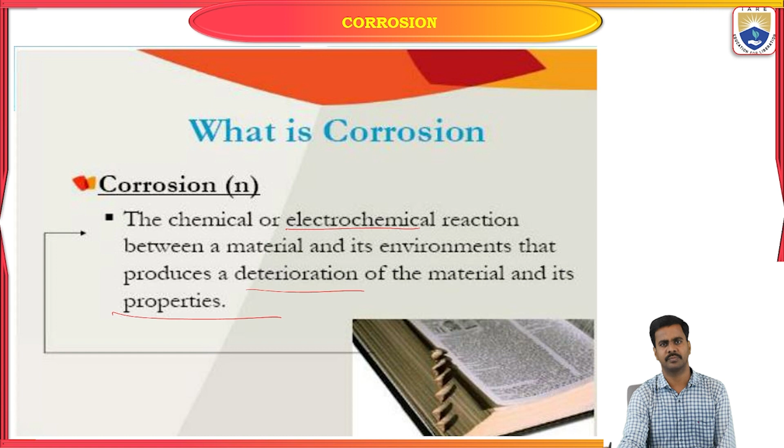So corrosion is nothing but a chemical or electrochemical reaction between the materials and its environment that produces deterioration or decay of the material and their properties. Major properties of the metals will be ruined by the process of corrosion.

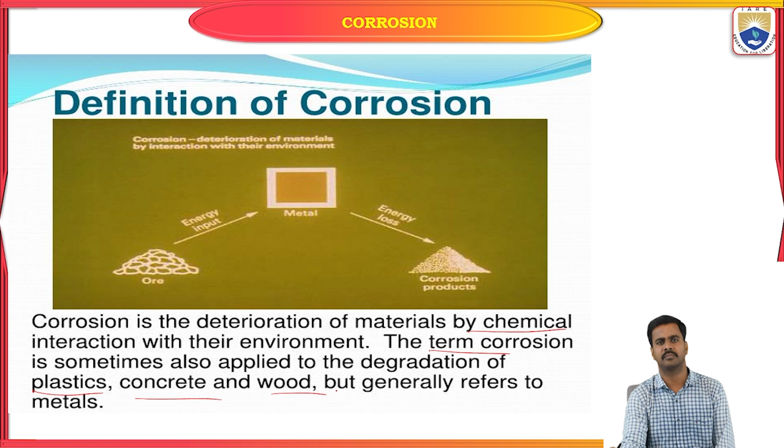So coming to the definition of corrosion: the deterioration of material by chemical interaction with their environment. The term corrosion is sometimes also applied to the degradation of plastics, concrete and wood, but generally it refers to metals.

Humans have most likely been trying to understand corrosion for as long as they have been using metal objects. The most important periods of pre-recorded history are named for metals that were used for tools and weapons, for example the Iron Age and Bronze Age, with a few exceptions.

Metals are unstable in ordinary aqueous environments, so metals are usually extracted from ores through the application of considerable amounts of energy. Certain environments offer opportunities for these metals to combine chemically with elements to form compounds and return to their lower energy levels.

Usually metals are highly reactive, so they are present in the earth's crust in a combined state, that is as ores. During the extraction process, some amount of energy is applied to this ore, hence the metal is separated from the ore. During this extraction process, the metal becomes unstable and highly reactive.

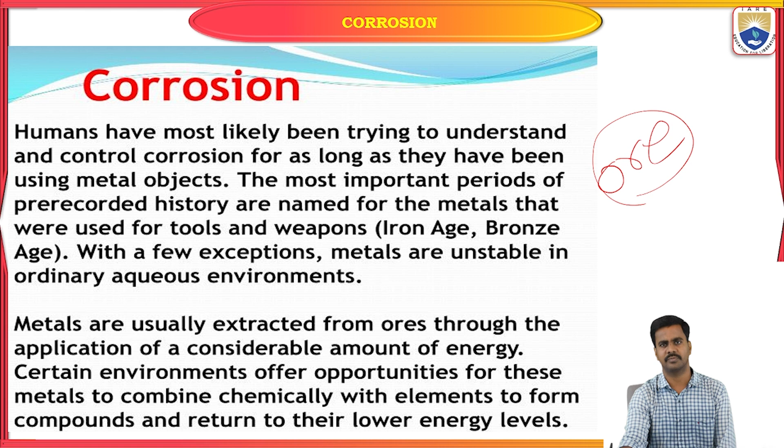So it is ready to react with whatever environmental factors surround it. Corrosion is the primary means by which metals deteriorate.

Most metals corrode on contact with water, acids, bases, salts, and aggressive metal polishes, and other solid and liquid chemicals. Metals will also corrode when exposed to gaseous materials like acid vapors, formaldehyde gases, ammonia, and sulfur-containing gases.

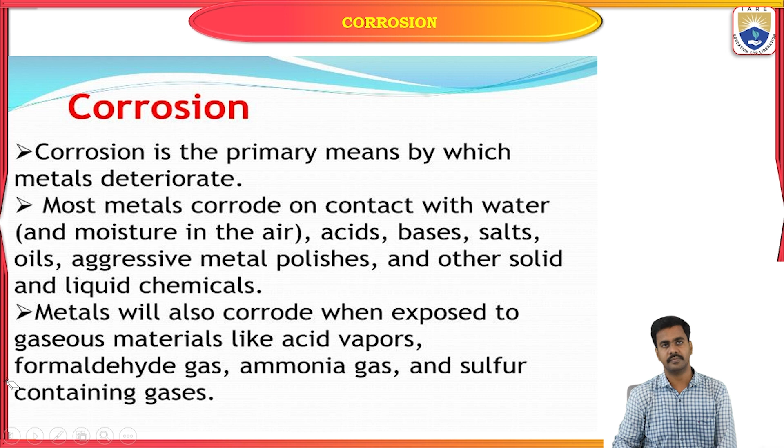So what are the major causes for corrosion? Acids and alkali, salts, mercury, water, and air which surround the metal. As we know, different types of acids are present in the environment, like HCl, H2SO4, and nitric acid. A number of acids are present in the environment.

Similarly, alkali is nothing but bases, and a number of bases are present in the environment. And salts, like sodium chloride, ammonium chloride, etc. And mercury and water - moisture is also present in the environment. Air, in the sense of oxygen.

So decay or destruction of material by the attack of these foreign substances is a major cause of corrosion. Moreover, interaction between two or more electrochemical surfaces, for example between steel and zinc metal, and between a metal surface and the atmosphere.

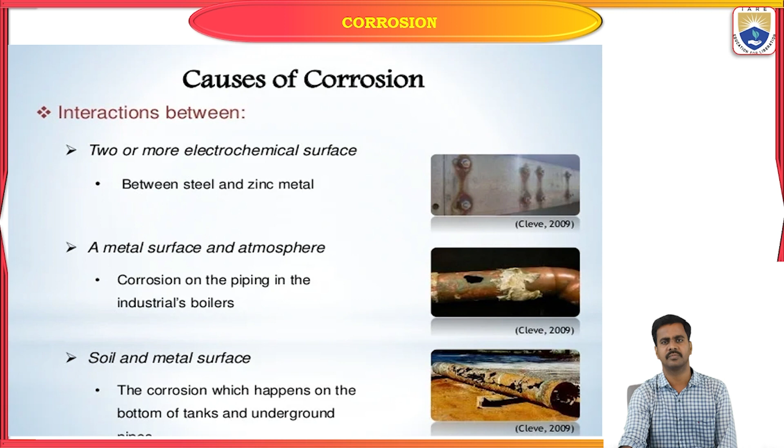Another major cause of corrosion is the nature of the metal or alloy. Corrosion process also depends on the nature of the metal, that means the reactivity order. So the position of the metal in the electrochemical series also affects the rate of corrosion.

Second, the presence of inclusions or other foreign matter at the surface. Homogeneity of the metallic surface structure. And nature of the corrosive environment, like acidic environment and basic environment, which surrounds the metal.

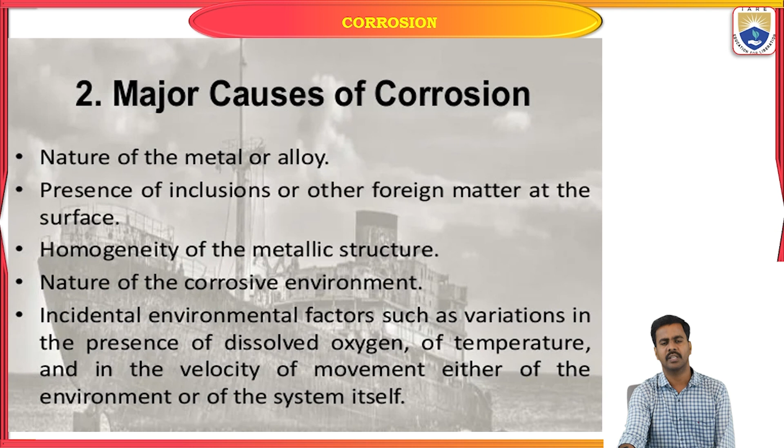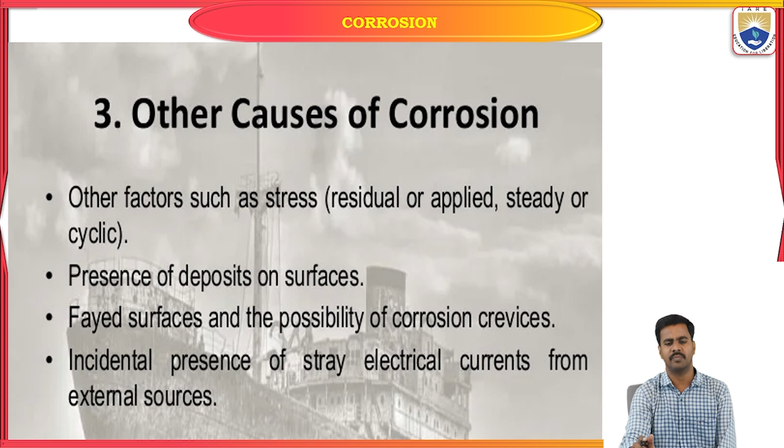Incidental environment factors such as variations in presence of dissolved oxygen, temperature and velocity of movement, either of the environment or of the system itself, and other causes such as stress, presence of deposits on surfaces, possibility of corrosion crevices, and incidental presence of stray electrical currents from external sources, depend on the nature of the environment. Basically, the destruction process has been classified into two types: dry corrosion and wet corrosion.

So what is the difference between dry and wet corrosion? First, coming to dry corrosion, it involves direct attack of dry gases like air and oxygen on the metal through chemical reactions. As a result, an oxide layer is formed over the surface. This type of corrosion is not common.

Next, the second type of corrosion is wet corrosion. It involves direct attack of an aqueous medium, like strong or dilute, acidic or basic nature of the environment, on the metal through electrochemical reactions.

In the wet corrosion process, the mechanism looks like an electrochemical cell. We know what an electrochemical cell is: anode and cathode electrolytes are present in the cell, and the anode and cathode are connected with an external circuit. So if we observe the mechanism of wet corrosion, it is very similar to the construction of an electrochemical cell.

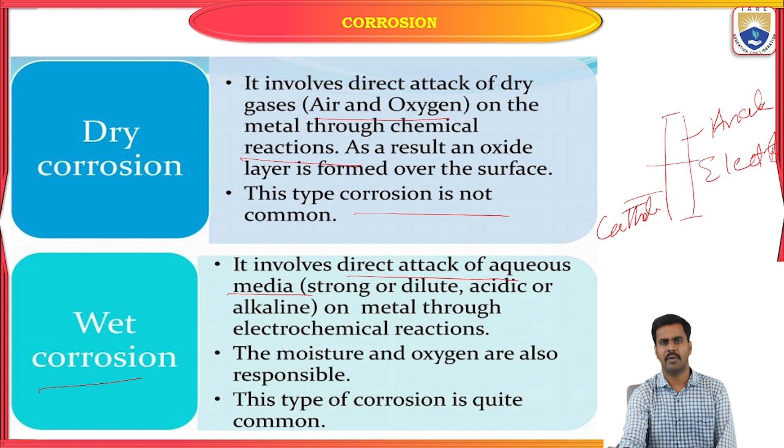If you take some metal, the part of the metal which is exposed to the environment acts as the anode, and the rest of the part which is not exposed to the environment acts as the cathode. The environment, or the nature of the environment in which the metal is present, acts as the electrolyte. That's why wet corrosion is also known as electrochemical corrosion.

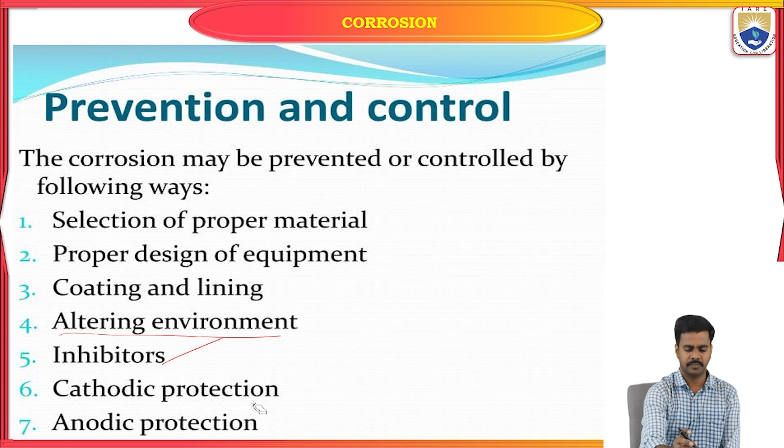Next, how can we prevent or control the process of decay? Corrosion may be prevented or controlled by the following ways: selection of proper material, proper design of equipment, coating and lining of the equipment, altering the environment, inhibitors, cathodic protection, and anodic protection. These are the major controlling methods of corrosion. Let us see one by one.

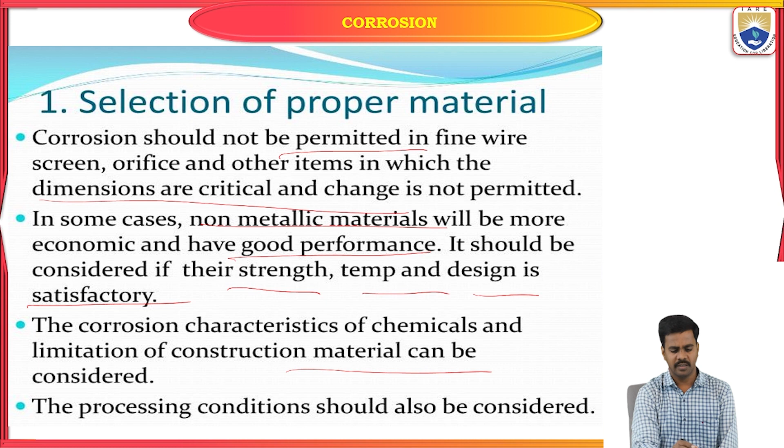Selection of proper material: corrosion should not be permitted in fine wire screens, orifice, and other items in which the dimensions are critical and change is not permitted. In some cases, non-metallic materials will be more economic and have good performance; this should be considered if their strength, temperature, and design is satisfactory. The corrosion characteristics of chemicals and limitations of construction material can be considered, and the processing conditions should also be considered.

Second, proper design of equipment. In the design of equipment, the number of fittings like baffles, valves, and pumps should be considered. Corrosion can be minimized if the equipment design facilitates it, so we should eliminate the crevices present on the surface of the equipment, ensure complete drainage of liquids, ease of cleaning, and ease of inspection and maintenance of the equipment. Direct contact between two metals should be avoided if they are widely separated in the electrochemical series, or they should be insulated.

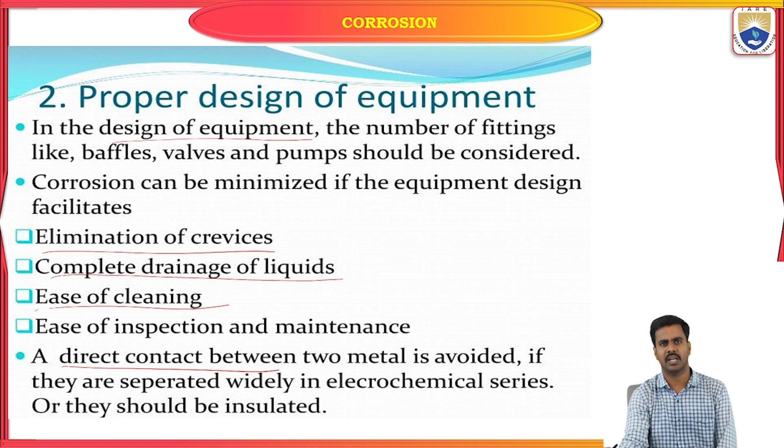Next, coatings and linings of the material. Non-metallic coatings and linings can be applied on steel and other construction materials in order to combat corrosion. There are several types of coating methods on the surface of the metal; by coating the metal, we can prevent or control the process of destruction.

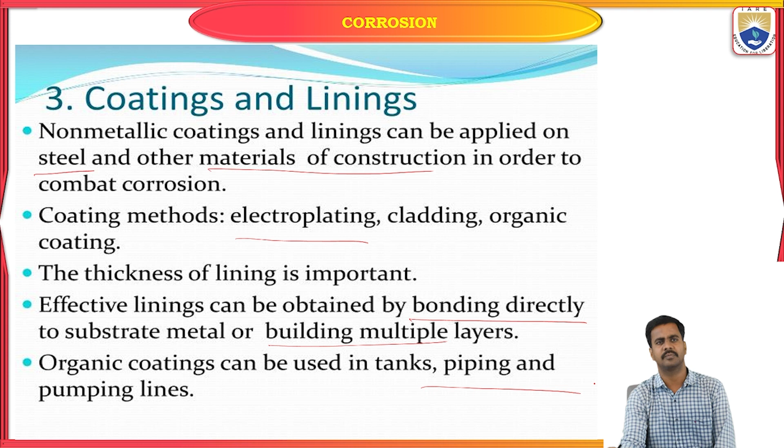For example, electroplating, galvanizing, and cladding. The thickness of the lining is important. Effective linings can be obtained by bonding directly to the substrate metal or by building multiple layers. Usually organic coatings, nothing but paints, can be used in tanks, piping, and pumping lines. A thin non-reinforced paint-like coating of less than 0.75 mm thickness should not be used in services for which full protection is required. The cladding of steel with an alloy is another approach to this problem.

So, SP glass can be bonded to steel so that the liner is 1.5 mm thickness, which is impervious in nature. Piping and equipment lined in this manner are used in severely corrosive acid services.

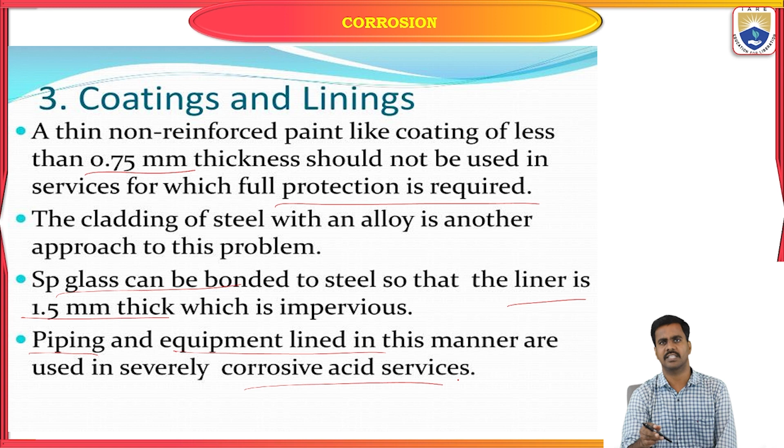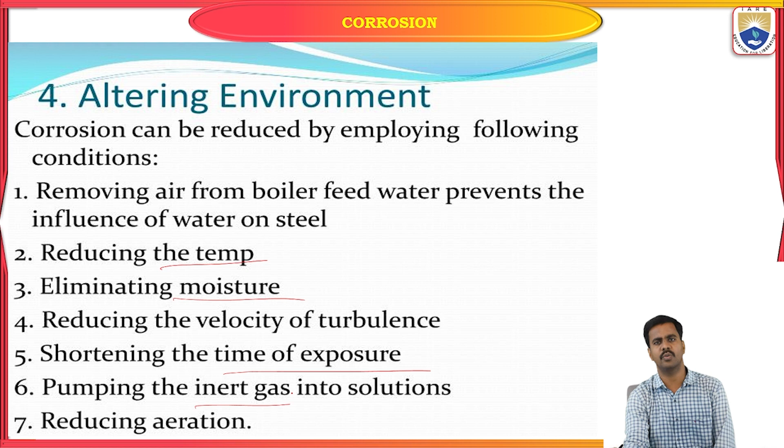And fourth, controlling method of corrosion is altering environment. Corrosion can be reduced by employing following conditions: removing air from boiler feed water prevents the influence of water on steel, reducing the temperature, eliminating the moisture, reducing the velocity of turbulence, shortening the time of exposure, pumping inert gas into solutions, and reducing aeration.

Next, inhibitors. The corrosion inhibitors are added to the environment to decrease destruction of metals. Usually these form protective films on the surface of the metals. These protective films are of several types: adsorption type, adsorbed on metals; scavenger type, example remove corrosion agent; and vapor phase type, sublime and condense on metal surface.

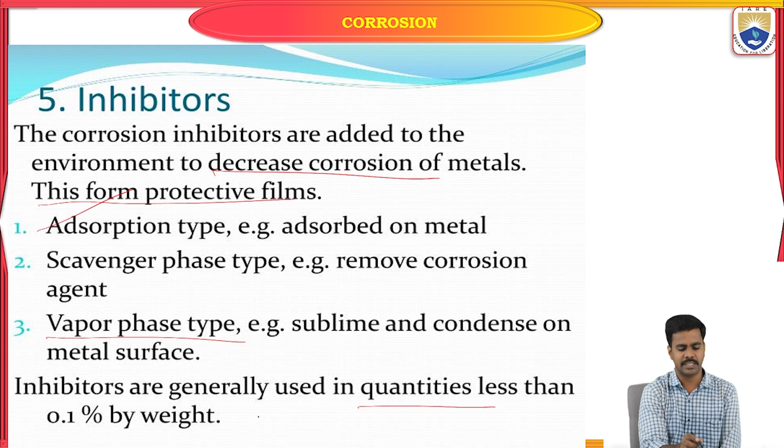Inhibitors are generally used in quantities less than 0.1% by weight. Some more inhibitors: chromate, phosphate, silicates protect iron and steel in aqueous solution, and organic sulfide and amines protect iron and steel from acidic solution. Copper sulfate protects stainless steel in hot dilute solution of H2SO4.

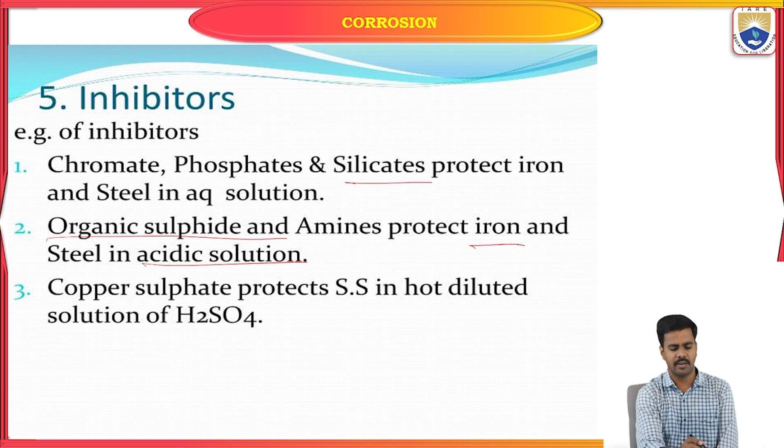Next, one more protective method, cathodic protection. Especially we can apply cathodic protection and anodic protection in case of wet corrosion or electrochemical corrosion, since it is a type of electrochemical cell. The mechanism of electrochemical corrosion looks like the construction of an electrochemical cell. That's why we can apply cathodic protection or anodic protection in case of electrochemical corrosion.

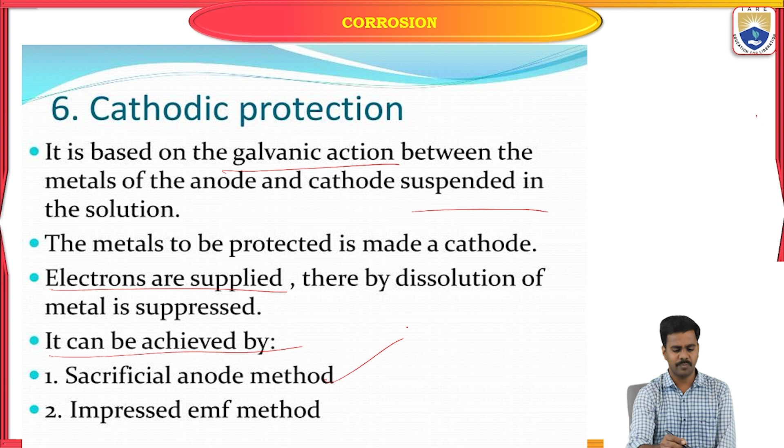So first, let us see the cathodic protection. It is based on galvanic action between the metals of the anode and cathode suspended in a solution. The metal to be protected is made a cathode, and electrons are supplied. Thereby dissolution of metal is suppressed. So cathodic protection can be achieved by sacrificial anode method and impressed current or EMF method.

Sacrificial anode method: in this method, anodes are kept in electrical contact with the metal to be protected. Usually highly reactive metals are used as anodes. Hence, concentration of corrosion takes place on the surface of the anode. So the anode will be corroded to protect the cathode. The anode is sacrificed since it goes into the solution.

For example, for the protection of iron and steel tanks, metals such as zinc, aluminum, magnesium, and their alloys are used as sacrificial anodes. These are used in a limited pH range. Anode material is selected from the electrochemical series. The anode should not be poisonous and not detrimental to the products.

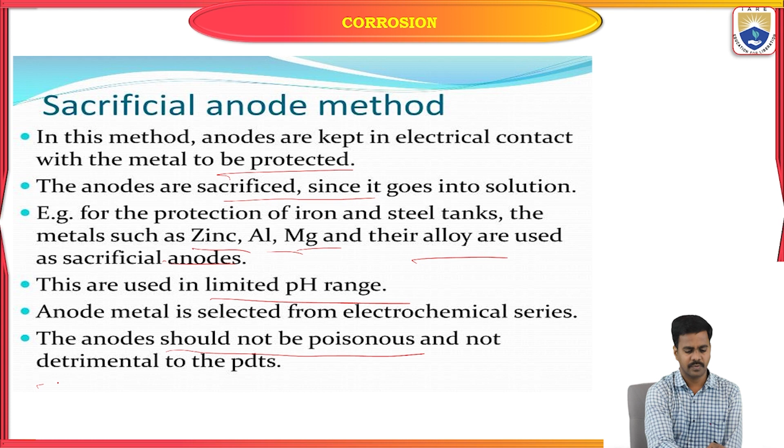Impressed EMF method or impressed current method is also known as applied current system. External voltage is impressed between the tank and electrodes. The negative terminal of the power source is connected to the material to be protected from corrosion, so the natural galvanic effect is avoided and the anode is maintained positive. Since the anode is not consumed, metal or non-corrodable material can be used.

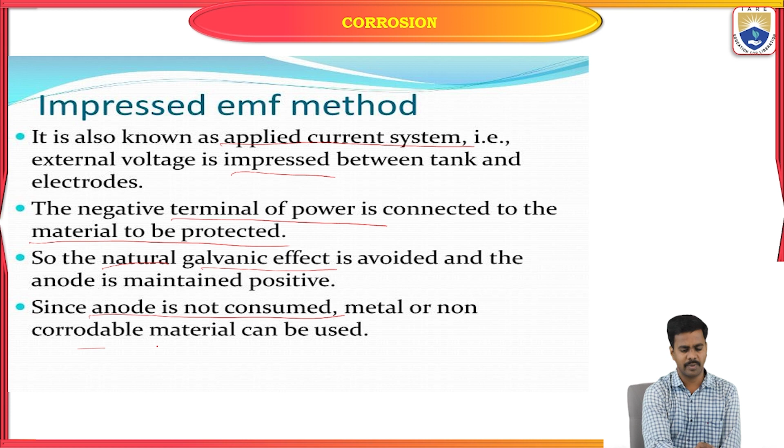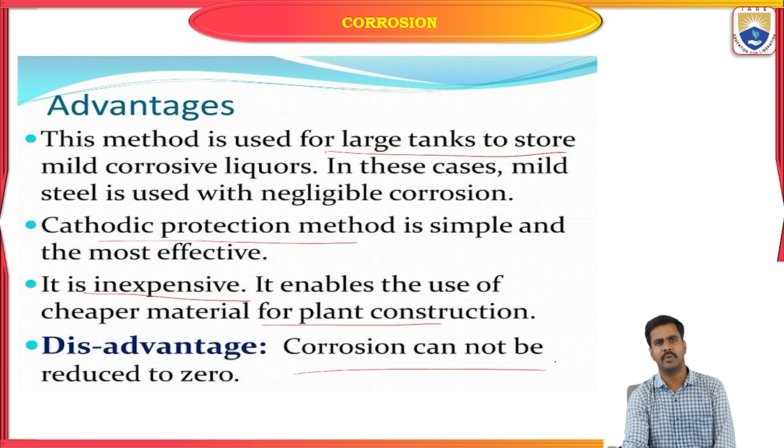Let us see the major advantages of the impressed current method or cathodic protection method. This method is used for large tanks to store mild corrosive liquids; in these cases, mild steel is used with negligible corrosion. Cathodic protection method is simple and most effective, and it is very less expensive. It enables the use of cheaper materials for plant construction. Coming to the disadvantages, corrosion cannot be reduced to zero.

Next, coming to one more corrosion control method, that is anodic protection. In this method, a predetermined potential is applied to the metal specimen and the corresponding current changes are observed. During the initial stage, the current increases, indicating dissolution of the metal. When current reaches a critical point, passivation occurs, that is, the oxide layer sets in under a suitable oxidizing environment.

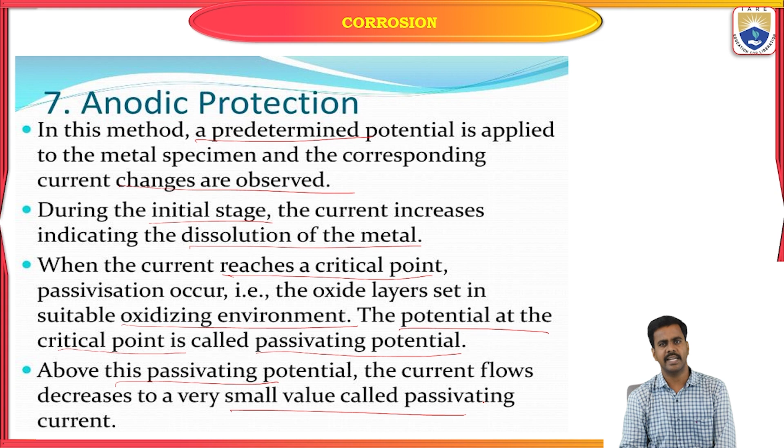The potential at the critical point is called passivating potential. Above this passivating potential, the current flow decreases to a very small value called passivating current, defined as the minimum protective current density required to maintain passivation. At this stage, an increase in potential will not corrode the metal since it is in a highly passive state. In case of stainless steel, titanium becomes easily passive and can be given anodic protection.

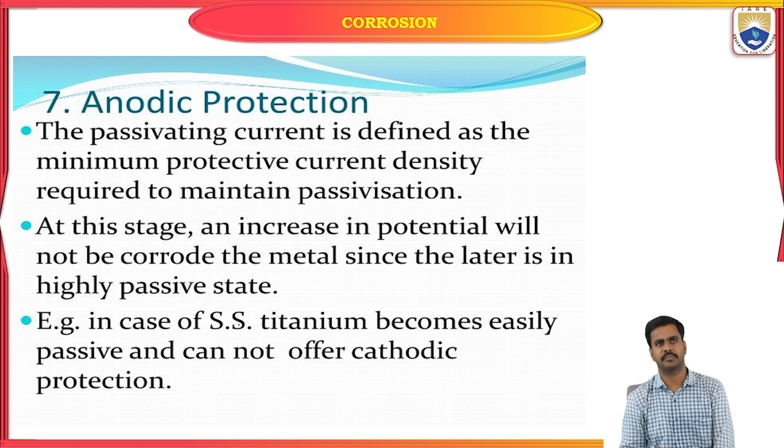Advantages: the anodic protection method is utilized in transportation of concentrated H2SO4. Disadvantages of anodic protection are that corrosion cannot be reduced to zero, and this method cannot be applied for metals which do not passivate.